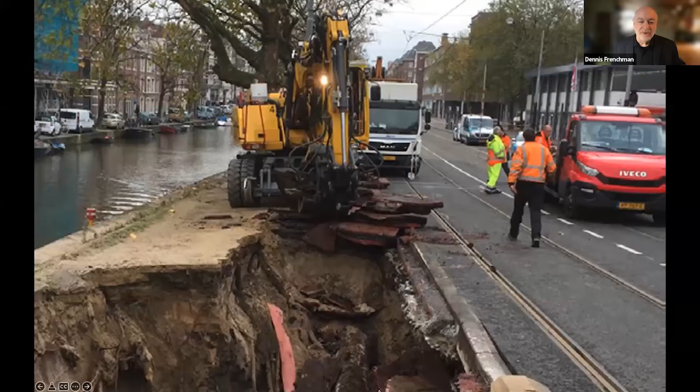And it's not just for convenience, because the impacts of contemporary traffic and these large tourist boats are eroding the ancient walls and infrastructure of the canal system throughout the city. And the interesting thing is there's no way to predict when sometimes these walls may collapse. So the city itself is at threat, and there's a need for a new kind of solution.

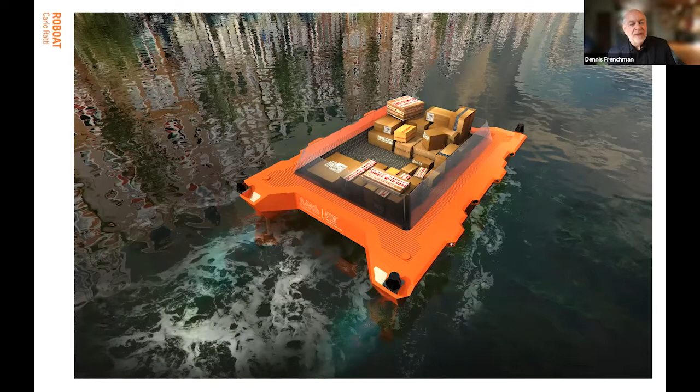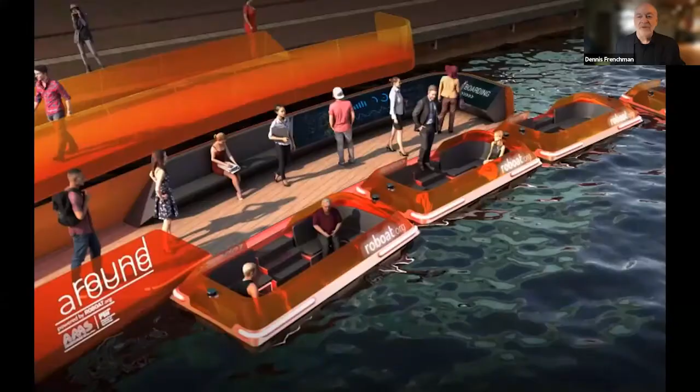So Roboat was originally conceived, here you see a sketch 5 years ago, as a way to address these multiple problems. And from the beginning, as you see it filled with packages rather than people, we saw this as a way of servicing the city using 21st century technology and bringing back the ancient logistical system of the canals. For packages, for people, of course, but also as physical infrastructure.

The idea from the beginning was to have these boats be able to connect themselves and be a sturdy platform on the water. So, for example, suppose during a rock concert or some high volume event, we need a new way of relieving people and getting them out of the area. The boats could assemble themselves automatically and provide this, or more space for markets and other uses that overflow from the small streets that surround.

And this led to a 5-year joint collaboration across MIT and the city of Amsterdam. This is one of our labs at AMS there, to develop this completely unique product. And you might say, well, cars are autonomous, you just build on that technology. Unfortunately, no. This is a challenge that's completely different. And it moved from these, I don't know if you can see my cursor, these small, almost toy-like quarter-scale robots in the beginning, up to the full-scale prototype, which is now operating on the canals.

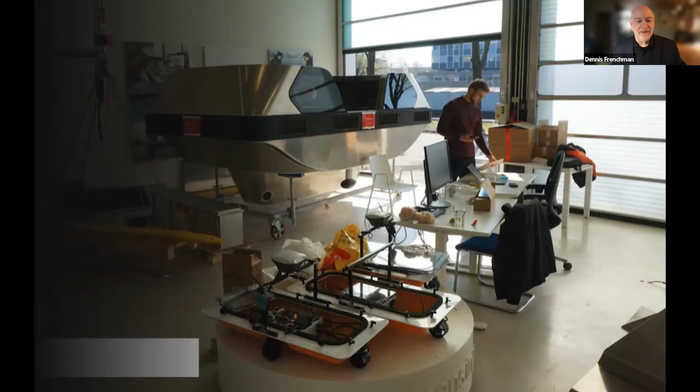And in a nutshell, we're talking not just about a boat, but a system of autonomous transport to service the city, reduce congestion, make service more efficient with less impact. And in order to do that, we had a couple of principles starting out. First of all, to put as many mechanics on the boat as possible, to adjust to different uses and conditions. And you can imagine the banks are not all the same. So how do you access this boat if you have a 6-meter difference between the land and the water in one place and 5 centimeters difference in another place?

Second, to adapt to existing systems, minimizing the infrastructure that would be necessary. And there are existing systems that are functioning. If we can use them, we should. And third, to conceive of the Roboat system as a towboat, first of all, a power source, plus the potential for trailers. So a tugboat and a trailer boat, to allow for expanded capacity and great flexibility. So towboats can be used to tow trailers or a variety of functions on their own. And we can take a look at that.

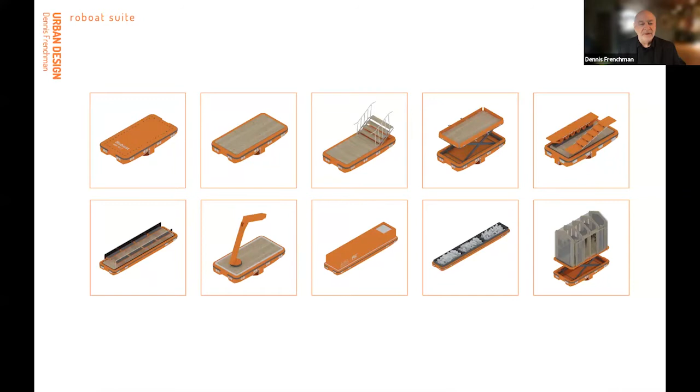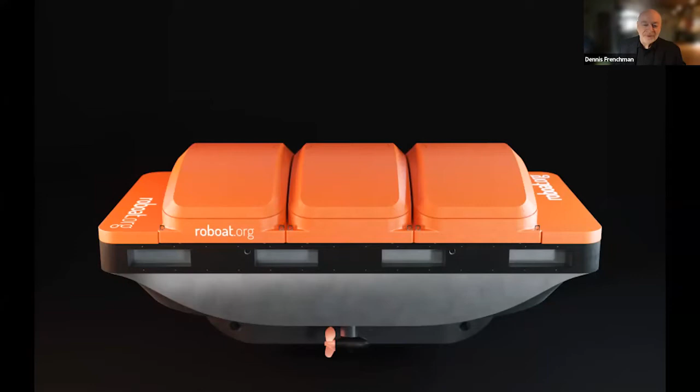So the basic boat is a power and navigation unit, highly technological, that can avoid boats, move around the city much as you would if you were in a rowboat yourself. This Roboat acts in place of a human driver. So there's a power base with all the equipment for autonomous electric mobility, and then various tops that can be put on, in this case, to collect garbage.

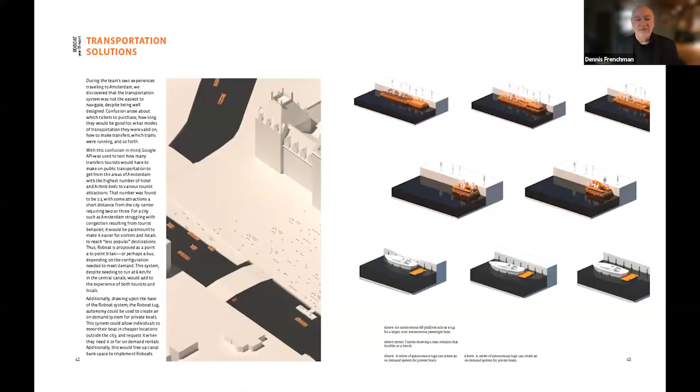So let's take a look at how this system could function in the city. And then I'll take a look at some of the electronics and mechanics for those engineers who might be on board with us today. Although my function, and SA&P's function, was the urban function, to make sure that this system could really serve the city. So let's start out with transportation.

There's a fundamental difference here, which is that currently the transportation is with these huge boats. They're very long and narrow. They're basically used for tourists, but on occasion do carry groups and other things around the city. But honestly, they're so big that they can't even negotiate the geometry of the canal system.

And to replace this was a series of pixels on the water, each a small autonomous pixel that can arrange themselves in different ways and serve different functions, kind of like a swarm across the city.

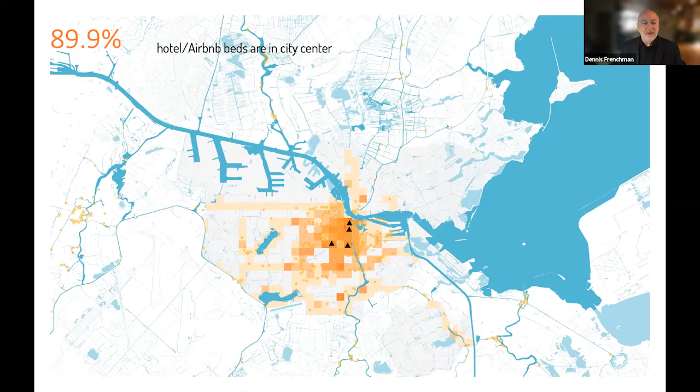Now, as in many places, most of the action is in the historic city of Amsterdam still. For example, 90% of all the hotel beds are in the city center, if you're thinking about tourism. Or, even if you're a resident, and let's say you're staying near the Rijksmuseum, if you want to get to an attraction, because of the configuration of the city, you have to go out of the city and then return back to the attraction. So it's a very circuitous route.

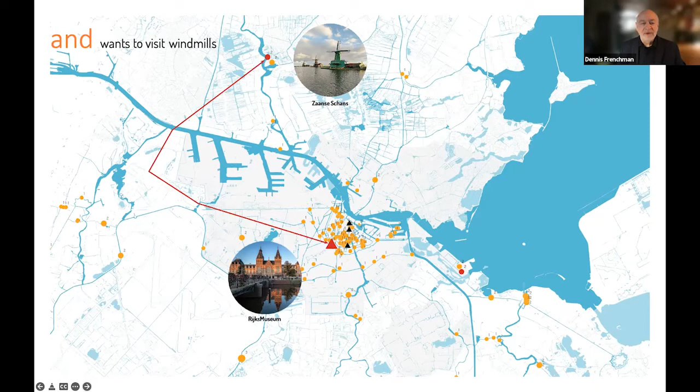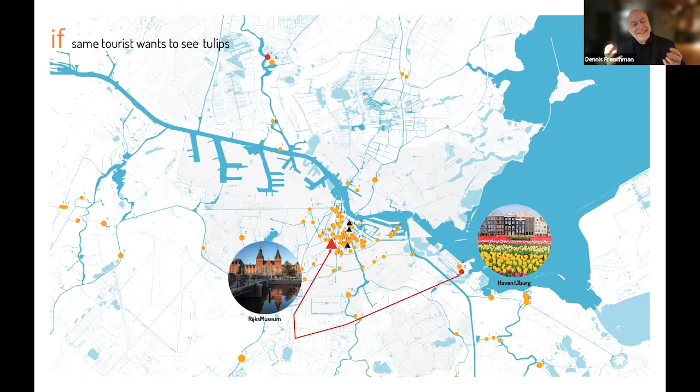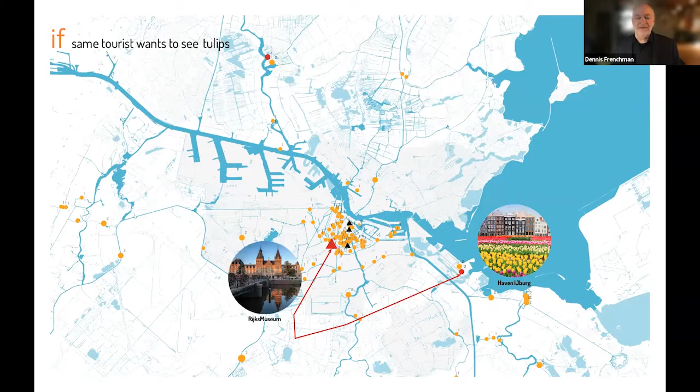There are no direct road movement routes. And if you take the subway, the metro, which they have, it requires two transfers. So it's quite a hefty movement for many people. It's not straightforward. Same thing if you want to go south, you have to go out to come back. And one thing is you're usually coming out from the canal system and back to the canal system, since most of these attractions and productive activities are located along the canals. And even to the south, two transfers are required to get anywhere.

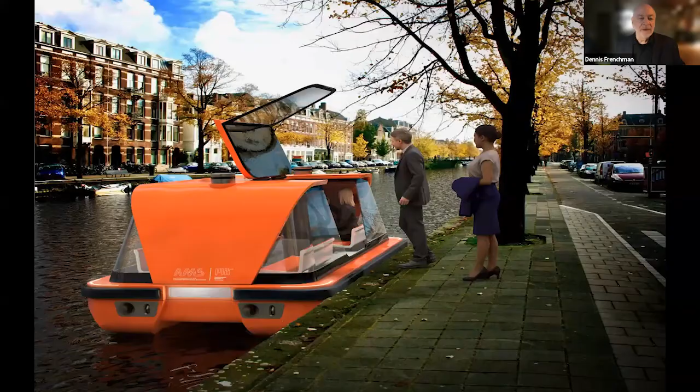So a pixelated, on-demand, and shuttle kind of service would be much more efficient, making use of the canal system that they already have, of the water system. And it seems like a simple thing, right? Sort of like an Uber on the water. But it really isn't, because if you look in this drawing, you'll see, they're stepping nicely onto this thing. But the canal edge, having been built over 500 years, is different in every single location. So how do you carry the ability to interface with the city on the boat?

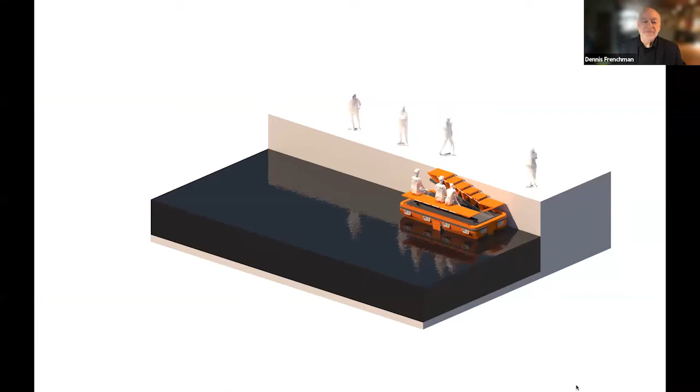And this is one example of a top that I talked about that could be placed. Or if you have more people involved, you could use a towboat and 3 boats connected behind and carry and move a lot more people.

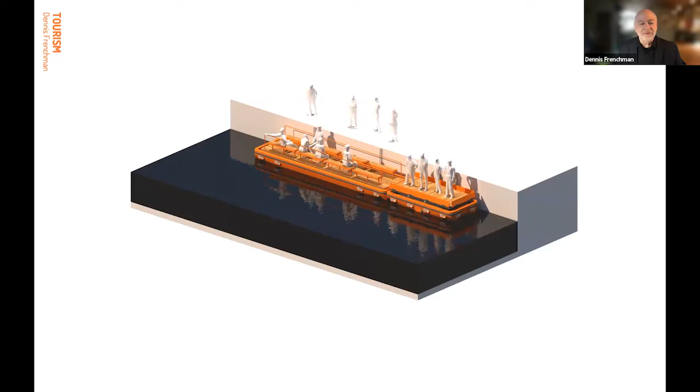Now, this isn't the only issue that has to do with mobility in the city. The other are these large canal boats that exist, the tour boats, in and of themselves. They're so large, and there are a lot of them, that there's no place really to store these along the canals. Where do you put them? So just from a really practical point of view, each boat every day, at the end and the beginning of the day, has to be brought out of the city center to a docking location somewhere to the north or the south. You add it up, this takes the driver of the boat, usually drivers own their own boats, or 2 or 3 of them are owned by a small company, 2,625 hours per year, and costs each one of those owners 26,000 euros a year to move around.

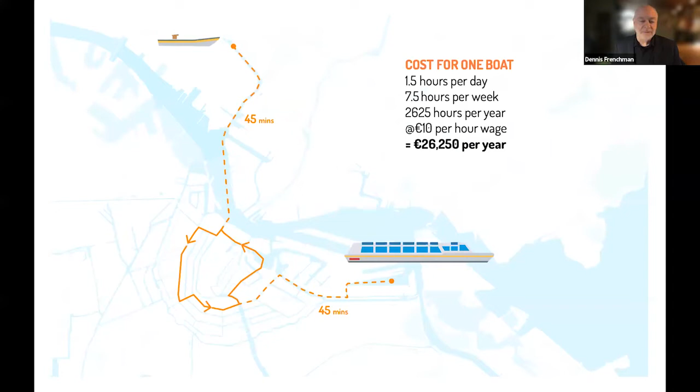It's incredibly inefficient. And when you think about it, you could use the Roboat to tow other boats. And if at the end of the day, or when these boats came out of service, the Roboat was automatically organized to take certain boats out there, it would remove the need for human activity and all of the gas and oil that is burned in the process that pollutes the waters and so forth with this totally autonomous boat.

Another, I'm sorry, I can't hear you all back, so if you have questions, I guess we'll have to wait to the end.

But another really practical problem in Amsterdam is that people use the edges of the canals to live. This is something that's been part of the scene in Amsterdam. It's very romantic, since the 1600s. But it's a nightmare for the city to manage and take care of all of these boats. And you can imagine the owners, after a while, they may die or they may go off to other things, and they don't remove the boats, they just leave them there.

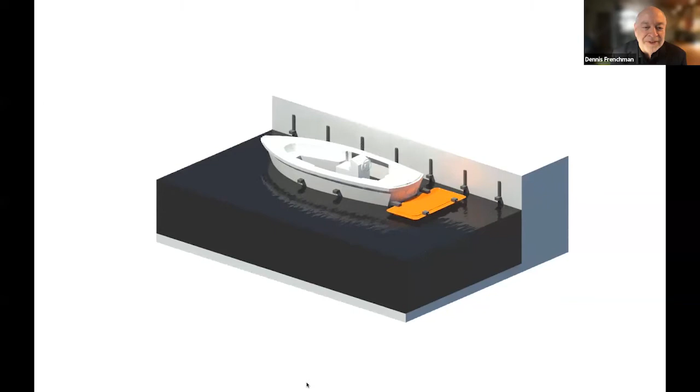So Roboat also provides a mobility solution for removing and managing these boats. So rather than getting a parking ticket or being towed away, your boat may be moved by Roboat into a more secure and better location for the city. All that it requires is an attachment mechanism, which we'll talk about in a little while. Okay, so let's move on.

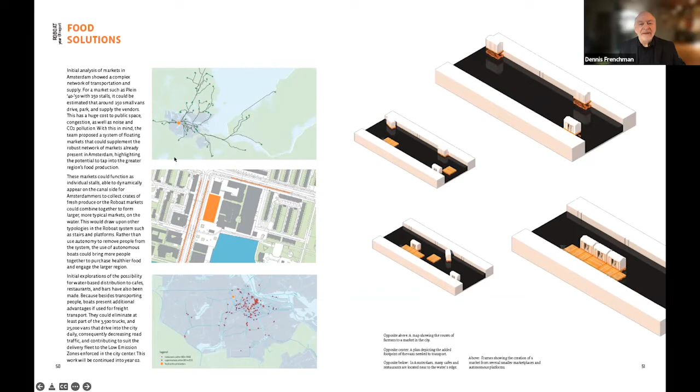How about food or the distribution? It could be food, could be packages, whatever. Each of these, what we call use cases, requires really understanding how the city works. Now, Amsterdam is blessed because it has a very productive urban center, but it is surrounded, by plan, by design, with a countryside that is highly productive for food.

And here's Paul Pronk, who has his farm growing carrots and vegetables 20, 40, 50 kilometers from Amsterdam. And if he wants to sell those vegetables in the local markets that are in the city, he must drive in a truck or in a kind of truck that collects across several farms. Let me see if I can read this.

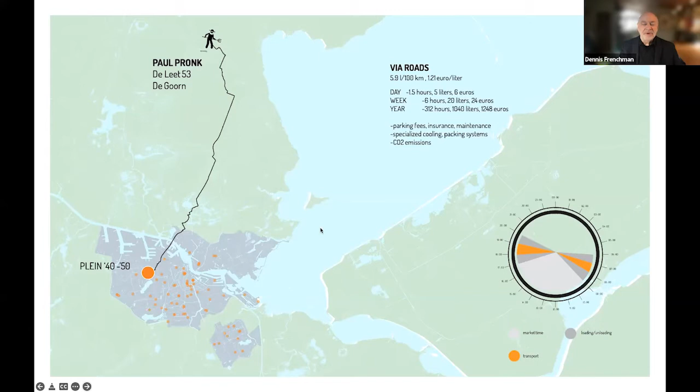It takes an hour and a half of driving, 5 liters of gas. In a week, there's 6 hours, 20 liters of gas. You get the point. In a year, 312 hours driving back and forth, burning again, putting out carbon emissions, burning gasoline, and so forth.

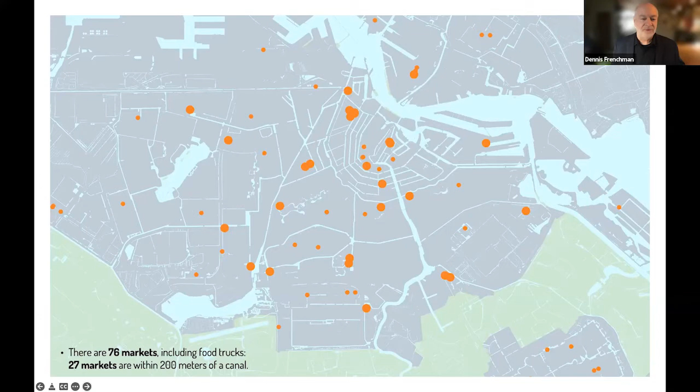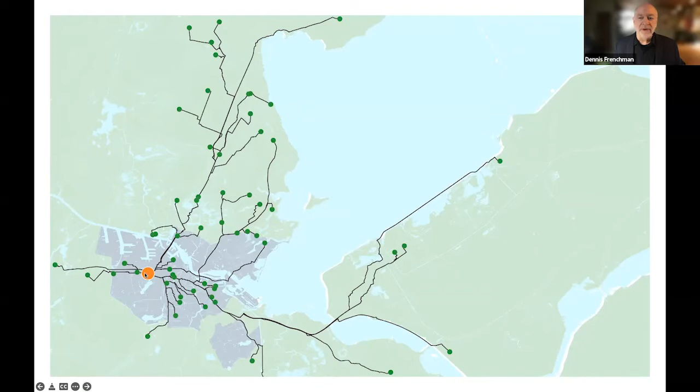And there are 76 markets in the city to which people are all converging from the countryside every single day. That's a lot of transportation and movement, but 27 of those markets are right next to canals. So you actually have this web of transit. This is just the traffic routes coming to one market in the city, and all going along these small streets that weren't originally designed to carry them, past people's homes and everything else.

And then all those trucks park at the market. And these lines you see here, the orange dotted lines, if you go to this particular market, all the trucks are lining up here, actually making it difficult for people to park and use the market, because you have the suppliers competing with the consumers, and it's kind of a mess. Yet right nearby here are a couple of different canals that could serve this function.

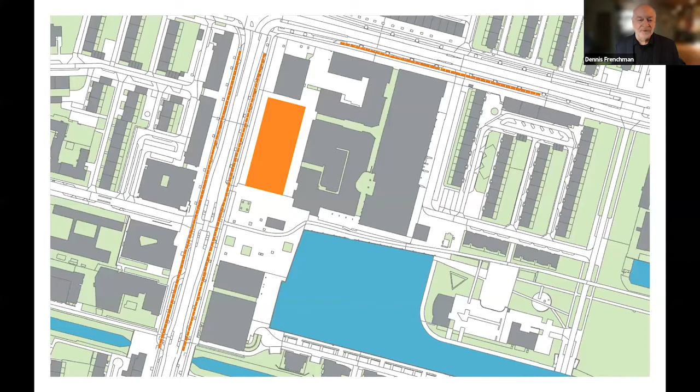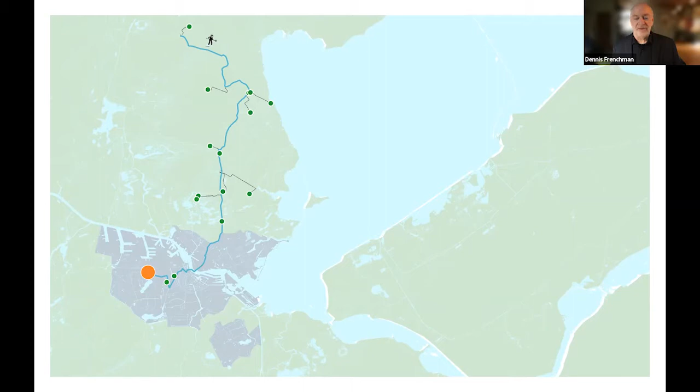And that same canal system provides a very efficient way for autonomous boats to collect the produce, join together into little trains and bring it into the city, and then distribute it in various ways, one of which might be this market. So this, again, every nice planning solution raises a very practical issue about how you create and serve markets in the city. And this little animation gives you an understanding of how that might happen.

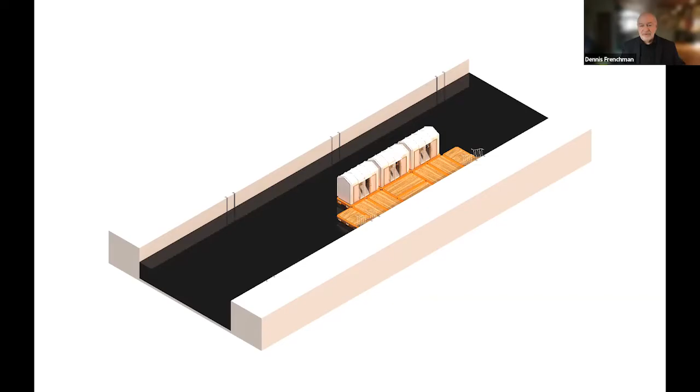You have roboats with tops which carry the produce. They can either act independently. So if I live in this neighborhood, the flower roboat comes by every morning at 10 o'clock and stops for an hour and then moves to other places, or the food roboat, or your package delivery, or whatever.

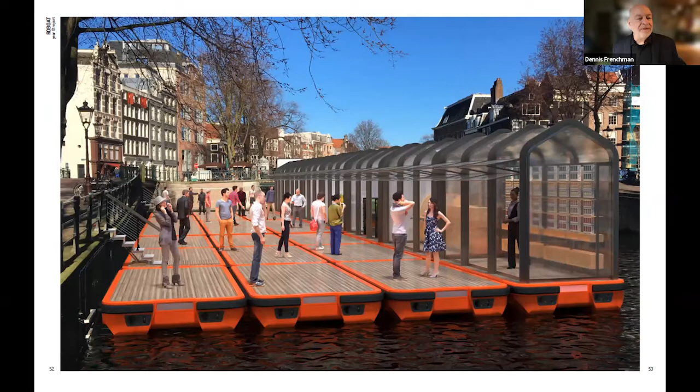Or you can use the roboats to provide a platform to extend the area available for market-like activity. Remember that once you have the streets on the sides and the parking, which is all there along the canals, there's very little space for anything that might expand, even existing markets, and this can provide a solution for that.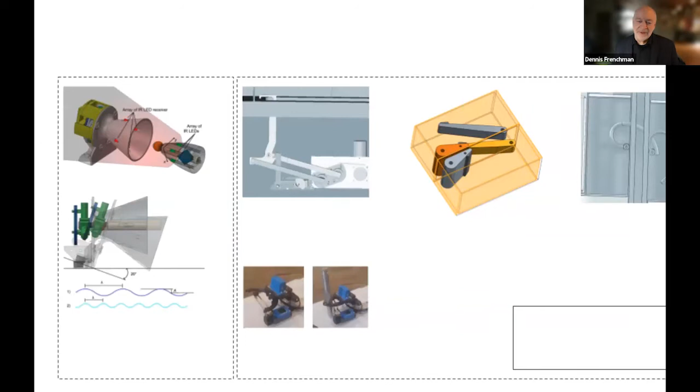Now, the other practical technological problem is, how do the roboats actually attach? And we've spent a couple of years working on various systems that would allow a secure attachment of the roboats to each other and to the canal walls. And it sounds, again, like, well, you just clip them together, but actually not, because if you think about it, it's a three-dimensional system. The boats are moving up and down.

There are all kinds of water currents, and how you get them to match up, not only in one way, but in multiple different ways, depending upon the situation, is actually quite a challenge. And finally, we've ended up with this kind of paddle system where the paddles interlock and then really pull themselves together, and it's completely flexible. And the boats themselves, given a need or a function, determine how to assemble themselves.

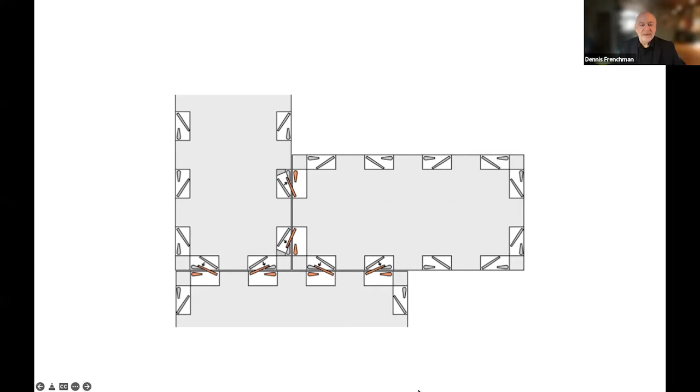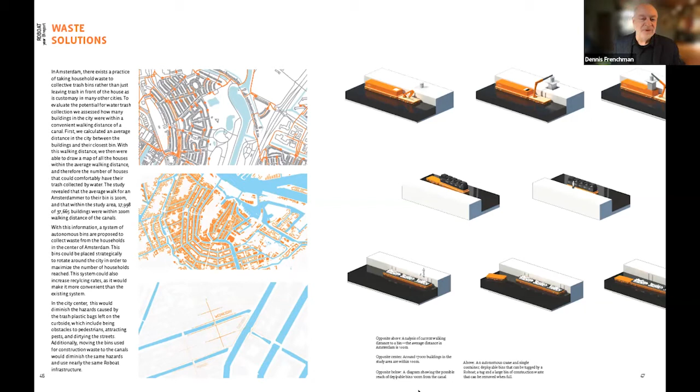So finally, James mentioned this. Let's go to the issue of waste. Now, Amsterdam is a large, dense city, and once you get things out and deliver them, what do you do with the waste? And that has become a difficult problem in the city. Why? Because either you have to have all kinds of bins everywhere, or you have to have large places where they collect and garbage trucks come by to pick them up.

The garbage trucks are heavy, they're noisy, and they are degrading the environment of the walls and so forth, as I mentioned before. Now, the city has tried to tackle this problem with a kind of interesting, but for me, horrifying way of dealing with the garbage in a componentized way. You see on the right what looks like a trash can, right? A big belly kind of trash can.

But it's more than that, because the trash, if you see on the left, is kept underground in a bin. This garbage truck comes along, and rather than just throwing stuff in it the way, at least I do, you put your trash can out to the curb and then these guys throw it in.

This has a little crane that picks it up and bangs it around in the truck to make sure it all falls out the bottom, and then puts it back. Can you imagine the noise that this is causing for people who are living, and these are people's apartments right next to it. So it's become quite a nuisance in the city.

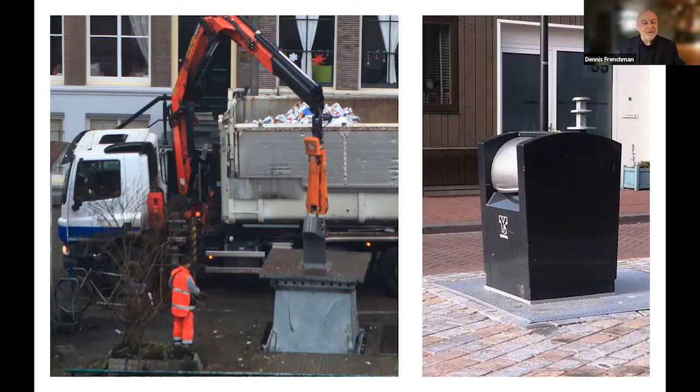Now, there's clearly no reason why we cannot do this from the water, which would at least technologically reduce the banging and eliminate the fact that these heavy trucks need to rumble on the small streets in the neighborhood, and preserve better the character of the neighborhood. But it's still not really an ideal solution.

So we've investigated several approaches to this, and we're talking about waste not just from individual homes, but also from hotels, from companies that are located within the urban fabric. There are many of them, including workshops and other things, and construction.

To build a new building in Amsterdam is a major undertaking. Even if you can find a site, or you're trying to restore an older building, you've got to get all this heavy material to the site and take out all of the demolition. So that's another practical problem.

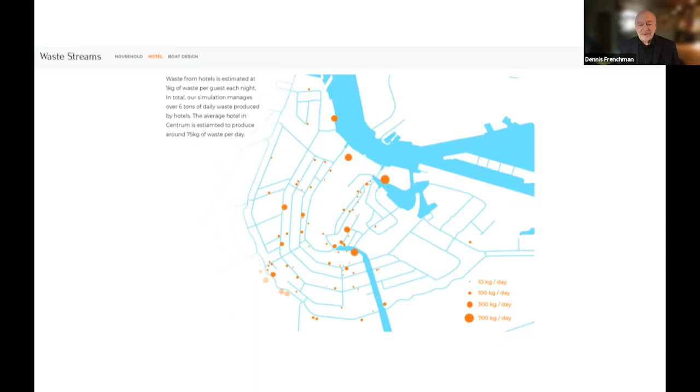And what we determined after very careful analysis is that, depending upon how far you think someone is willing to walk, you could actually cover the entirety of the existing ancient downtown of Amsterdam with Roboats. And it requires surprisingly few boats. I'm just going on my memory here, but I think you can service all of the waste removal except for construction in downtown Amsterdam with about 60 of these Roboats.

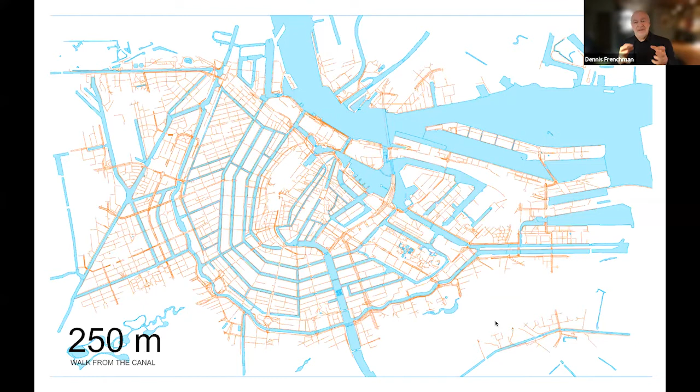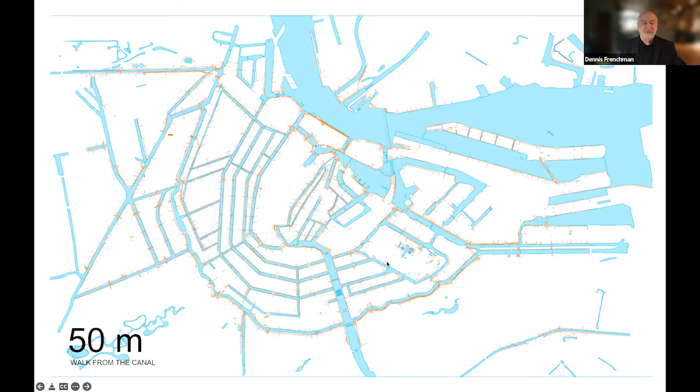And the reason being is that they show up, they stay for a period of time to collect the trash. Once they're full, they automatically go and empty it at a central location, and then either return to the same spot if there's more demand, or move on to another spot. So the actual number of Roboats that you need to service the entire city is rather low. It's very, very efficient. And it's also on demand.

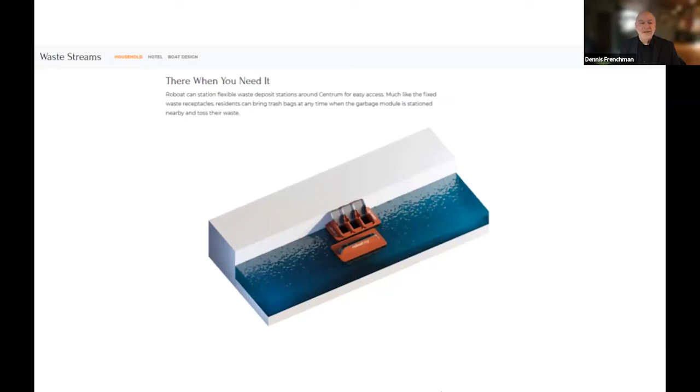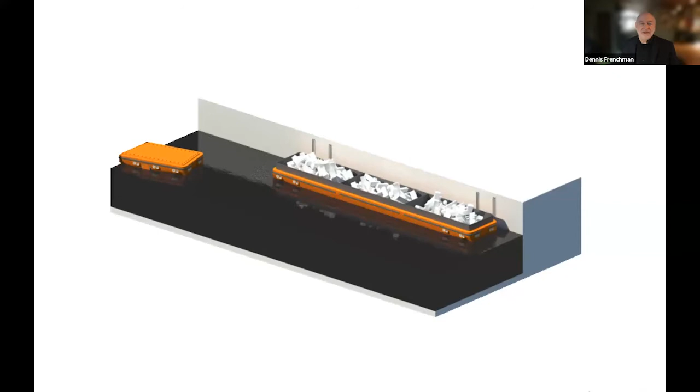If it's needed, it's there, and we can provide all of the infrastructure on the boat itself, as I showed before. Now, construction waste is a whole different thing, but here's where the towboat comes into play. You could have a collection of Roboats taking the waste, and the towboat comes along, and when we're ready, silently and gently takes it all away. And you can imagine how much energy we're saving, how much noise and disruption

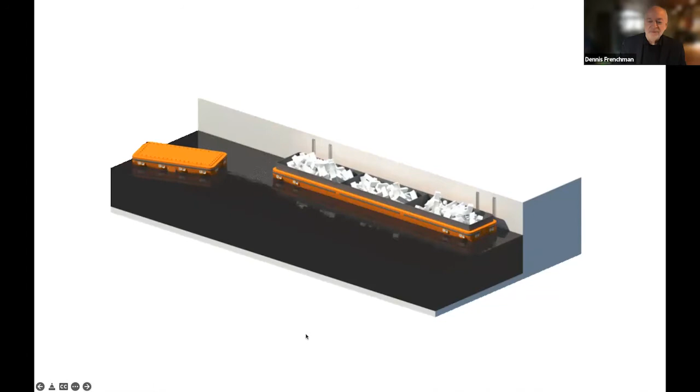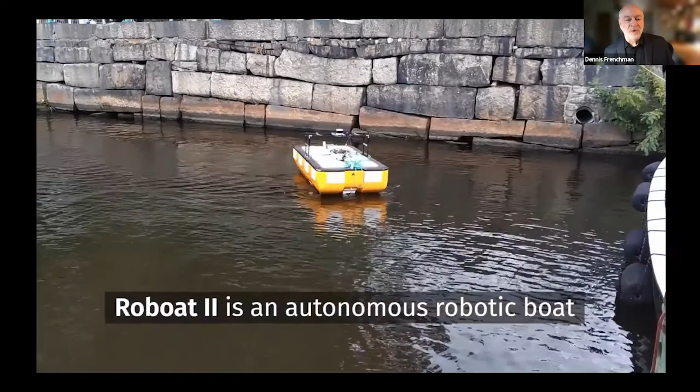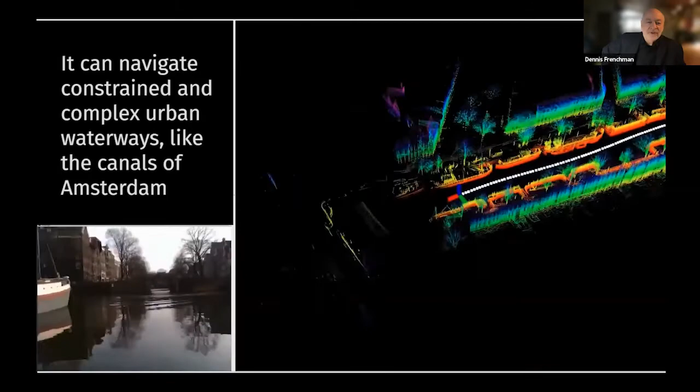that you save. Now, I promised up front for those who are more engineering oriented to show some of the background on this, which I'll do in this video. This was Roboat 2. We went from a quarter scale to a half scale to full scale. This is Roboat 2. And you can just read the text. It can navigate constrained and complex urban waterways on its own. And of course, when you have students, they wanted to ride even the half scale. It was a little dangerous, I think.

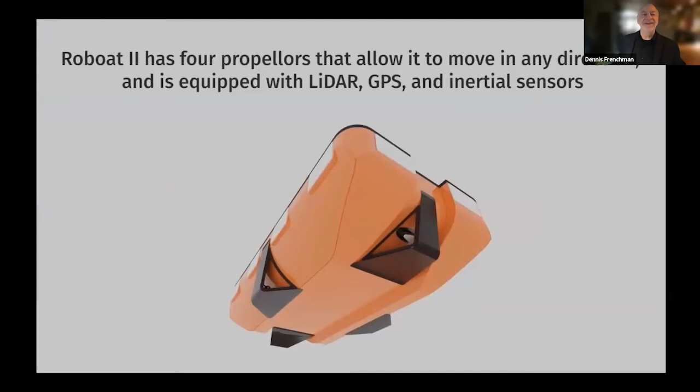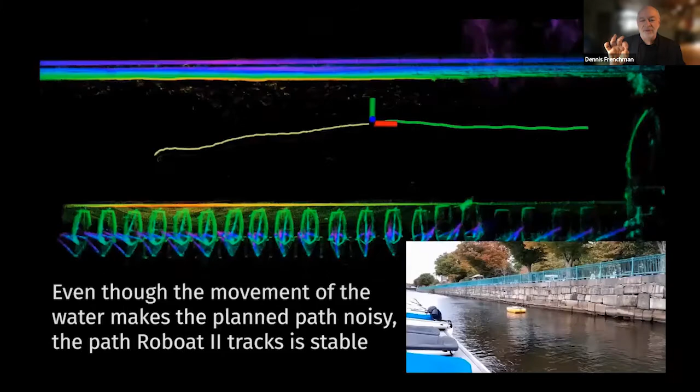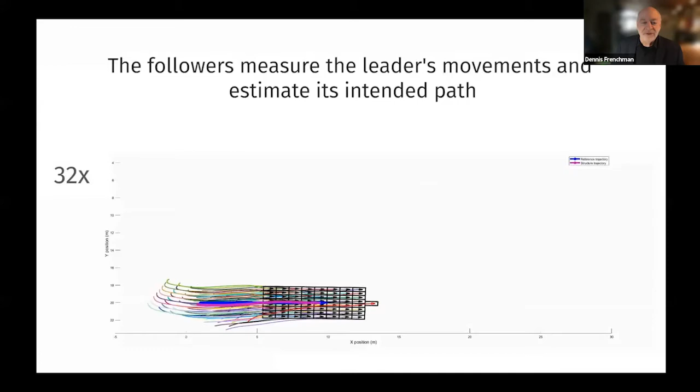The 4 propellers give it incredible mobility. And just like you, when you're navigating to a destination in the city, you pick local destinations first and move to your general destination along this path. And it's incredibly sensitive. The boats are modular. We can put them all together. They're each operating independently but collectively at the same time, or have followers.

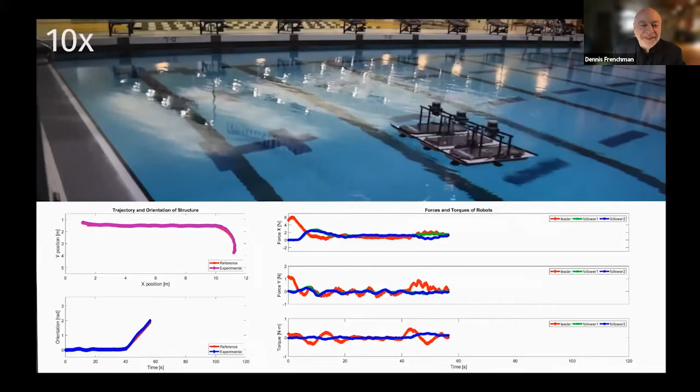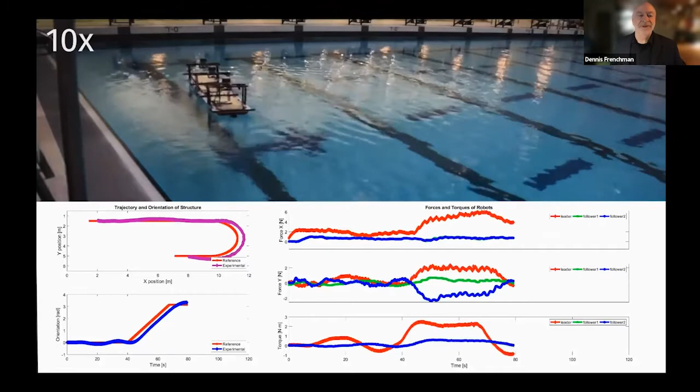This is at the MIT graduate student pool. This was Roboat 1, when it was kind of like a toy. But here you see the trash collection system in a miniature scale. Okay, so just a couple more things about Roboat. It's not just a transportation and logistical system. It's also a maintenance and functional system for the canals themselves.

So one of the problems I mentioned was the instability of the walls. And the city is desperate. You know, these walls just collapse with absolutely no warning. You cannot tell. And the city needs some kind of predictive system so they know how to maintain the walls.

At the same time, there are biological issues with the canals, algae growth, pathogens, and stuff. You can imagine what ends up getting thrown into these canals. And dirt and other things carried by the water. The canals actually tend to fill up, so they have chemicals that have to be monitored. There's organic material that has to be monitored, and the actual structure of the canals themselves.

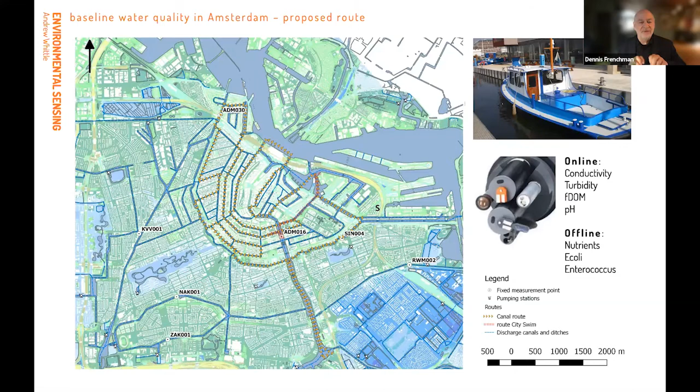So Roboat, because it would be this pixelated system using every canal in the city all the time, would be able to sense and provide a real-time picture of the condition of the canals and the water within them. So this was civil and environmental engineering's job to figure out how to do this across the systems of the

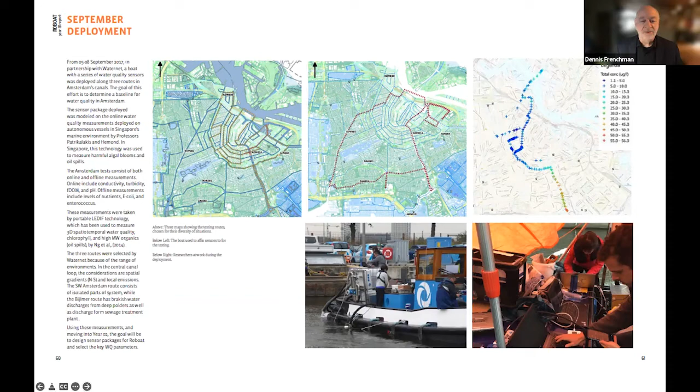canal. And to do it, we had a team on the water periodically for the past 5 years, developing the technology in a very compact form that can read the environment of the canal and report to Waternet, which is the agency that actually maintains the canal, on the real-time condition of the canals.

And if you're interested, and I'll show a final video in a minute or two, how does it deal with the walls? Well, LiDAR radar is really the guiding light of the Roboat, and it is monitoring every second 20 or 30 million points along its environment. Could be people, could be boats moving, could be water, or now it is also focused on the walls of

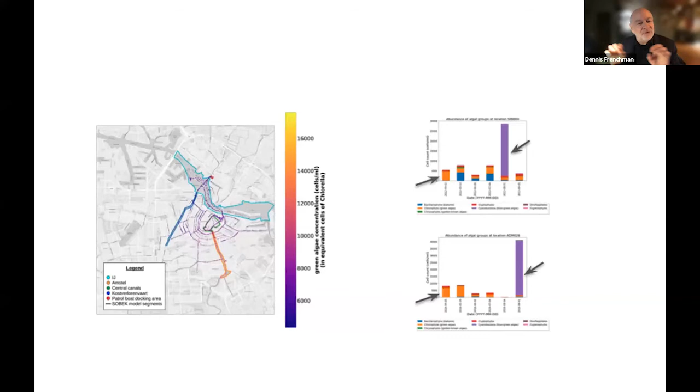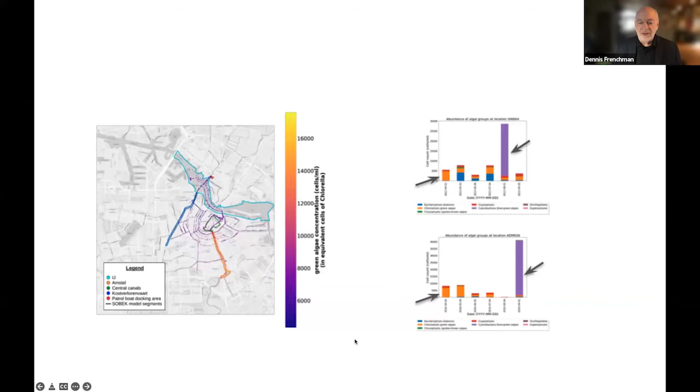the canals. And it maps those walls, all the joints and everything, and can detect very slight movements and report, this wall is starting to sink, or this one is starting to move forward. We better go out and maintain it, and actually develop maps which can aid the city in maintaining the walls before they fail.

So this is Roboat 3, which was launched in the fall. As I said, there were 2 other prototypes at different scales. And this is where the system is currently at. You can see it's not that big. It is a pixel. It's 4 meters by 2 meters. So what's that? About 13 feet by 6.5 feet. It has this keel underneath it.

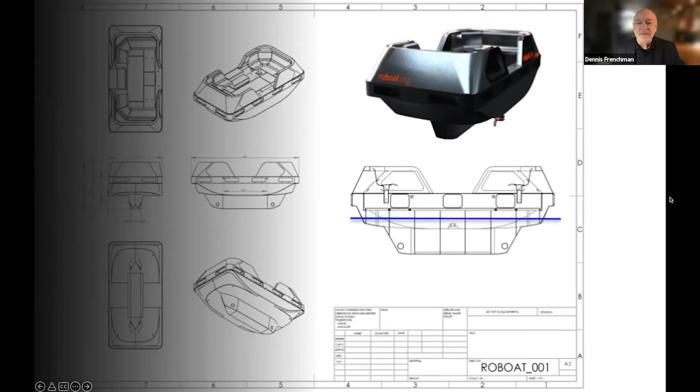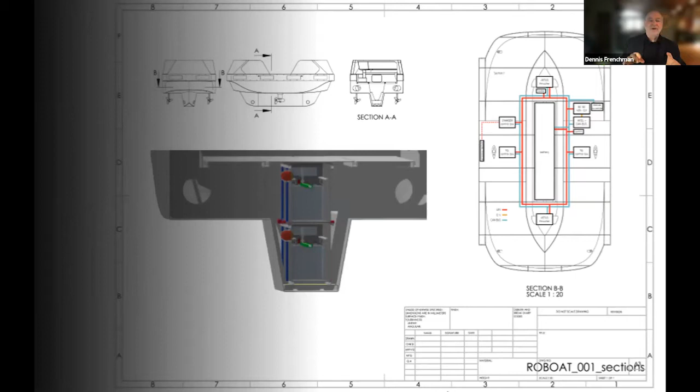Let me get to the next slide, where all the electronics and the batteries and everything are housed. And this is one key to the stability of the platform. You can imagine if you throw a piece of concrete into this thing, or if 20 people get on and they're all loading on the right side, it has to be stable in the water.

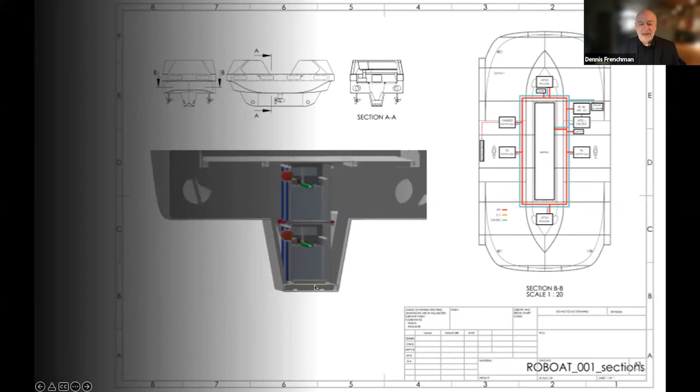So it has a kind of tuned mass that helps keep this thing perfectly stable in the water as a platform, and also the 4 propellers keep it very steady in the movement and can assist to stabilize it. So the keel is a very important piece of this, and let me show you now how it all operates.

This is Lucy. Lucy is a Roboat, a fully autonomous, zero-emission boat that operates on urban waterways, and she can change the way cities work. As congestion and emissions continue to rise, while cities continue to grow, the existing infrastructure of many cities struggles to keep up. Roboats offer a solution by moving road traffic to the water. By bringing passengers from A to B, or as an on-demand boat, taking you anywhere you want. And they can also help the city as a multi-purpose workboat.

Take Crystal. She is equipped to collect household waste to free the streets from heavy garbage trucks. Roboats are fully autonomous, so they navigate without a skipper and can operate 24/7. In order to sail by themselves, Roboats need to perceive their environment and recognize objects such as bridge pillars, floating objects, and of course other vessels. The primary source of information comes from a LiDAR sensor, but Roboats are also equipped with cameras, GPS, and a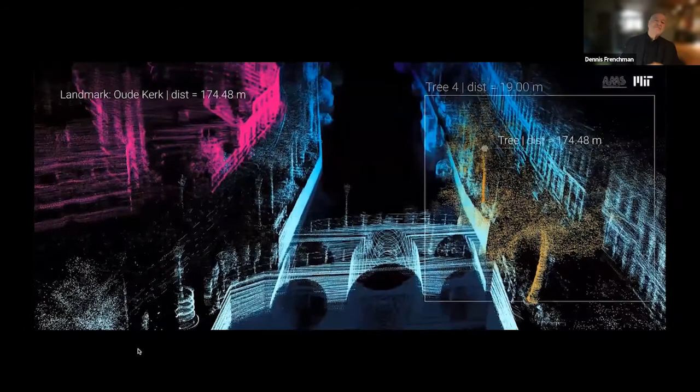digital compass. Roboat's onboard computer combines and processes all of the data and runs the Roboat software so it can successfully complete its mission plan. After 5 years of development, testing, and experimentation, we have now successfully enabled autonomy on the full-scale prototypes. Roboat is ready for the next step. Join us and let's unlock the potential of urban waterways together.